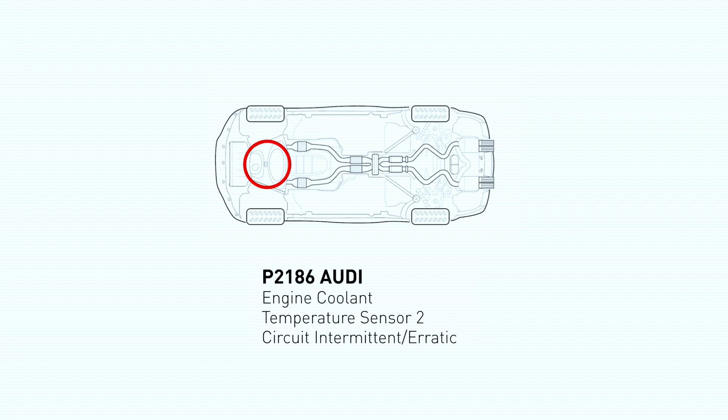Use the OBD2 scanner to scan your vehicle and see the error code P2186. This code is set when the PCM detects an erratic or intermittent voltage in the control circuit of the number 2 engine coolant sensor. Here are 3 of the most practical solutions to fix Audi's P2186 error code.

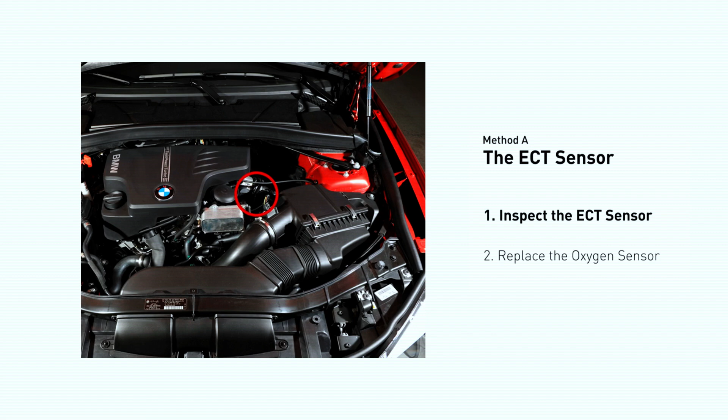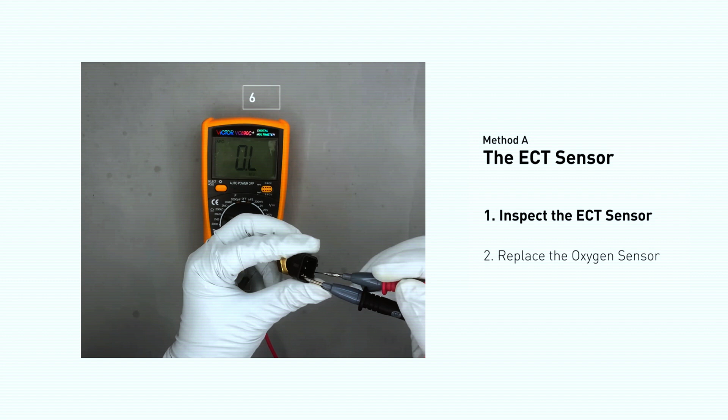Method A, the ECT sensor. In most cars, the primary ECT sensor is installed near the thermostat in the cylinder head. Remove the ECT sensor from the engine. Use a multimeter to proceed with a test on the ECT sensor. At the ambient temperature of 68 degrees Fahrenheit, the sensor resistance is between 2000 ohms to 3000 ohms. If you do not get a reading, this indicates that the ECT sensor is faulty and needs to be replaced. However, if the ECT sensor has a correct reading, then we will proceed with Method B.

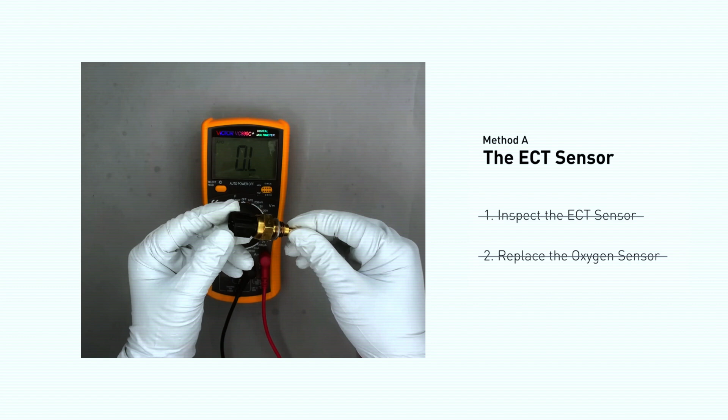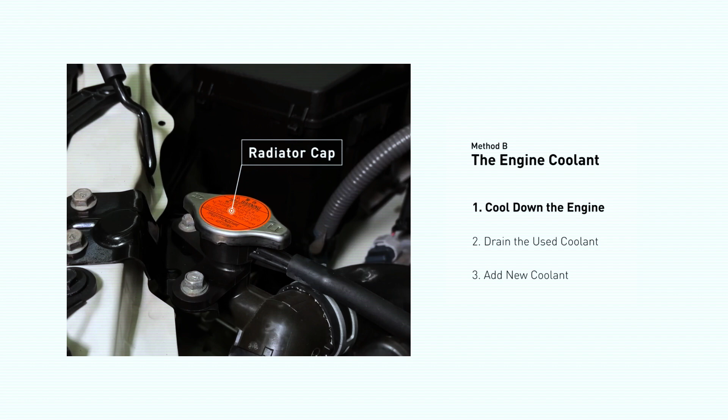Method B, the engine coolant. Engine coolant reservoir is often a translucent white bottle, and the radiator is the large panel at the front of the car. Cool down the engine and remove the radiator cap. Locate the radiator lower hose, place a container underneath the hose, remove the hose and allow the coolant to drain.

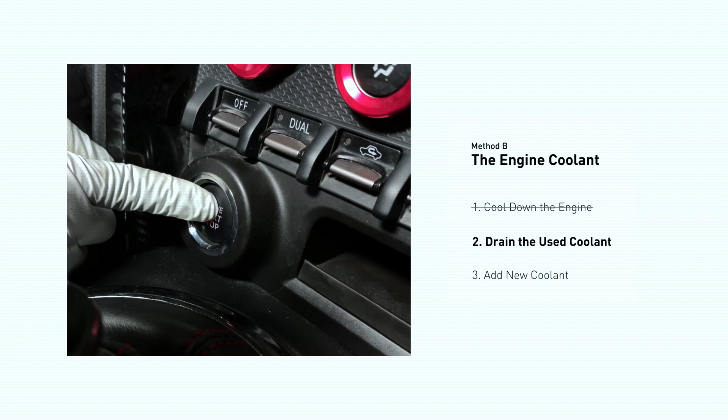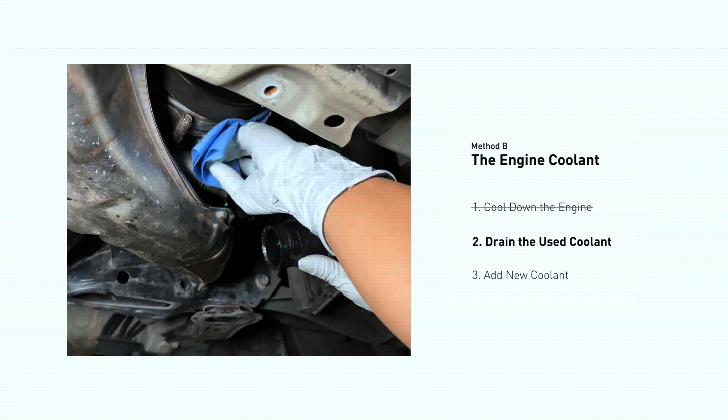To better drain out the used coolant, start the engine, and turn the temperature control to maximum heat. Closely monitor the coolant temperature gauge on your dashboard to prevent engine overheating. Once the used coolant is drained out completely, turn off the engine, and replace the hose.

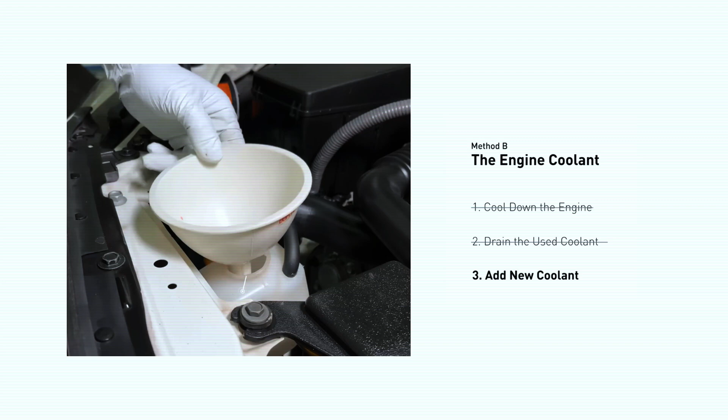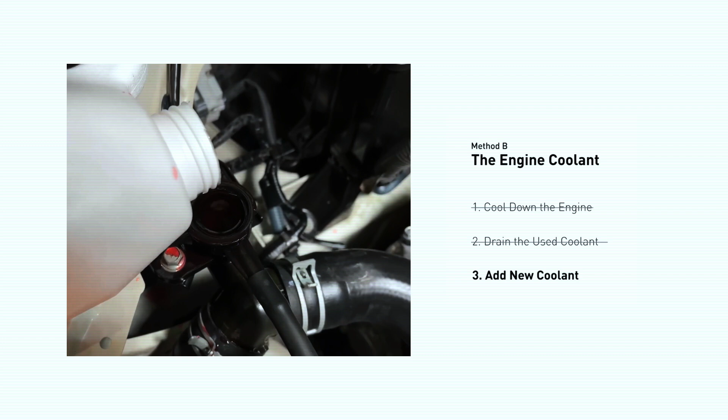Next, add fresh coolant to the radiator until it reaches the base of the filler neck. Then take off the cap of the coolant reservoir, fill it with fresh coolant, not exceeding the full line, then replace the cap. After filling, start the engine, and let it idle for a few minutes to let the system purge all the air out, and then add coolant as needed.

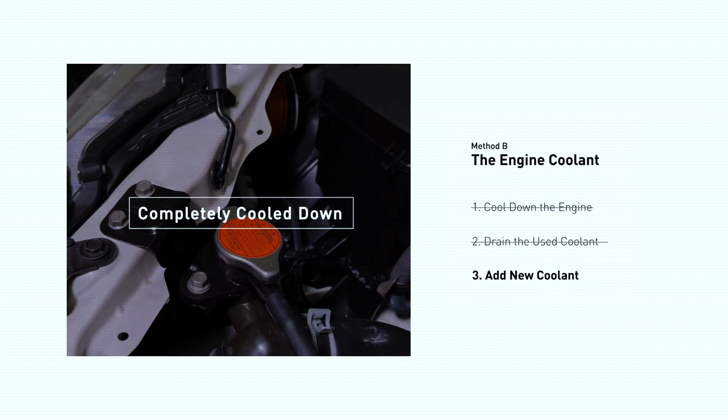Replace the radiator cap, closely monitor the coolant temperature gauge on your dashboard. Once the coolant temperature reaches 190 degrees Fahrenheit, turn off the engine. After the engine has completely cooled down, remove the radiator cap and add coolant to its full level.

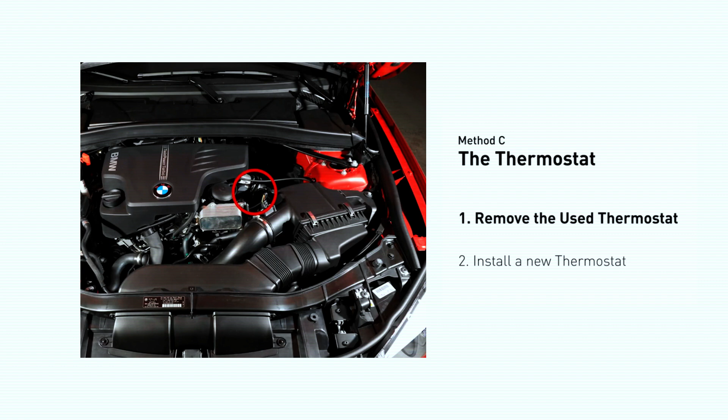Method C, the thermostat. In most cars, the thermostat is placed near the water pump on the cylinder head. First, carefully remove the thermostat from the engine. The engine has to be cooled before attempting the process, and then install a new thermostat.

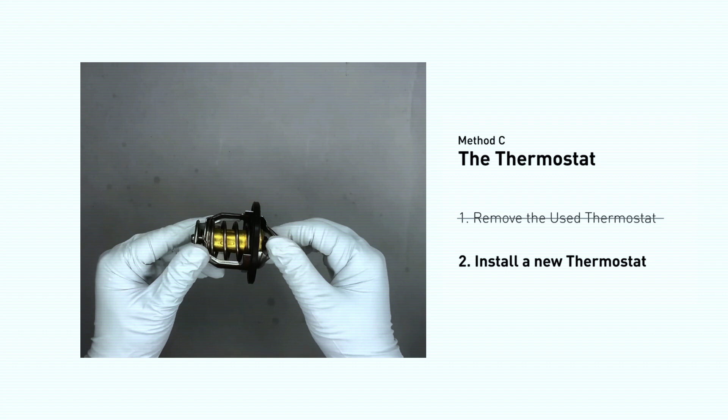To install it correctly, you need to make sure the short end goes toward the hose and the deep end goes towards the engine. When you install it back to the engine, make sure the jiggle valve is pointed straight up to the top of the engine, so the air can get through the system.

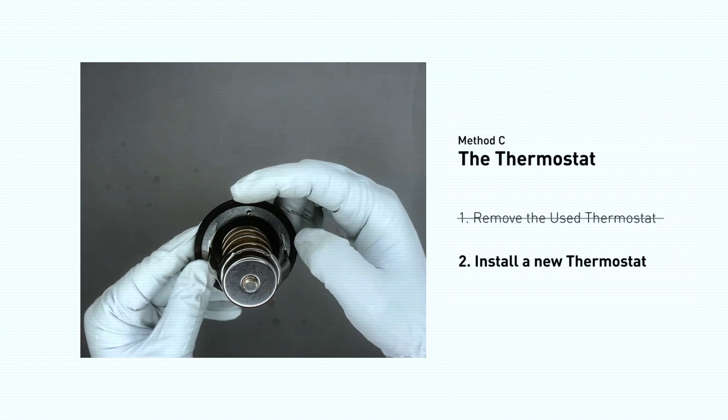So here are 3 of the most practical solutions to fix Audi's P2186 error code. After the repair, you can now use the OBD2 scanner to clear the error code, and tap the rescan button one more time to make sure everything is fine with your vehicle.